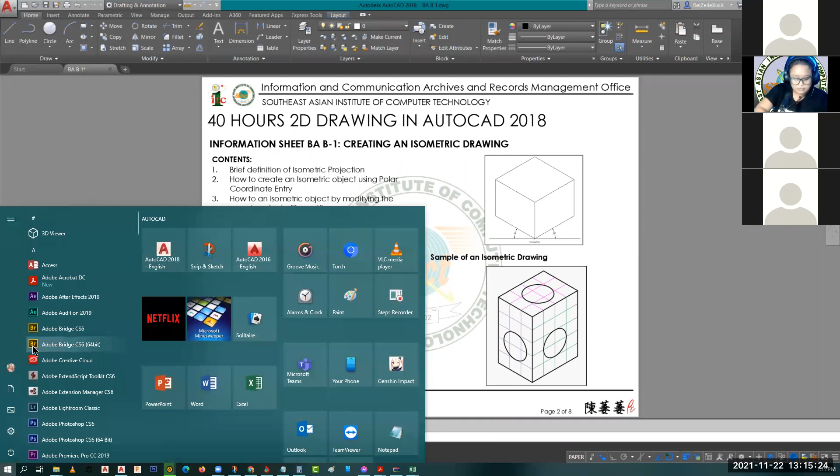So let's have a sample. Sandali, sige, I'll use paint. Hindi ko pa kasi siya binuksan kanina. Okay, i-align ko lang ang aking mic at saka ang aking tablet.

Okay, so for perspective drawing, you need... let's have this as your horizon. I know it's not a perfect line since I'm just using a pen. If you want to create a perspective drawing,

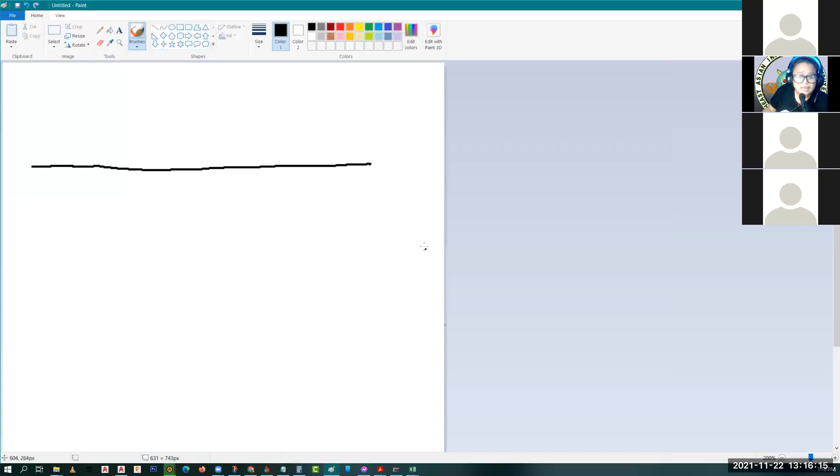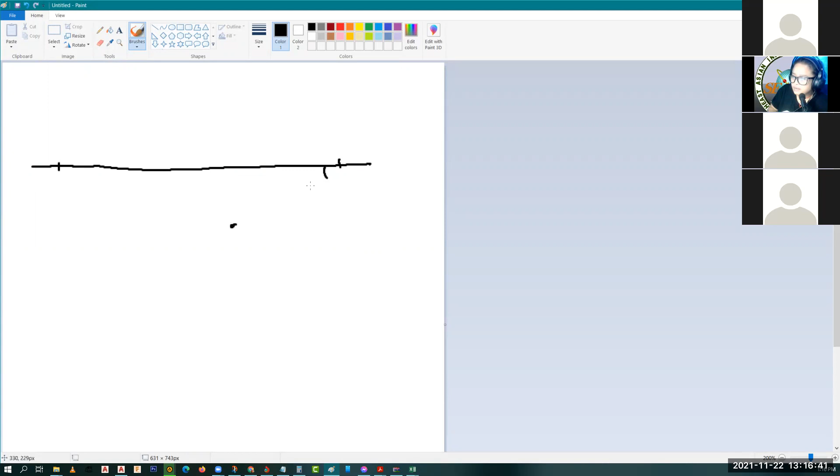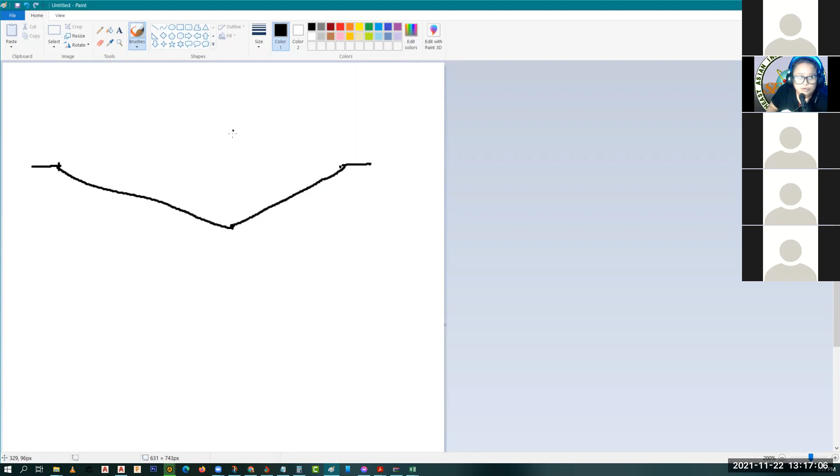Okay, so this one, let's erase this. Basically that's an angle, right? Now, if you have a height here, let's say the height of your box, you have something like this. This end, you need to reconnect to this edge. So that's your perspective line.

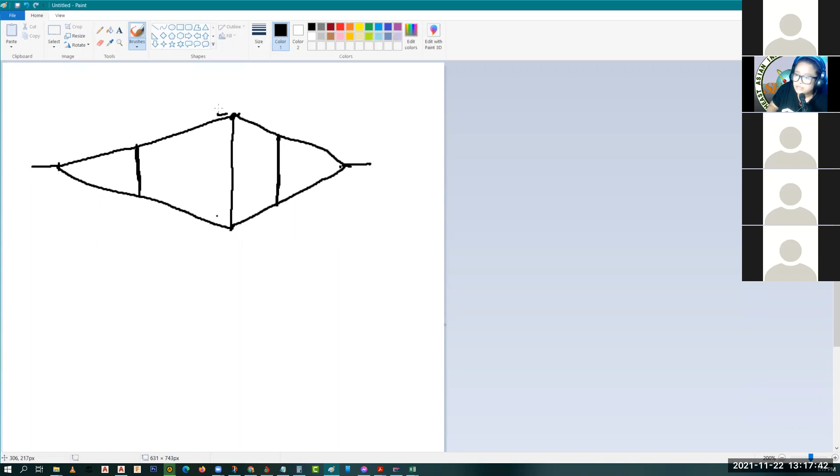Now, measure the length of the box. Let's say here, then here, let's say that's it. For this one, if you have 10 units here, because you used an angle, the height of this is less than 10, because there's a height difference due to the angle. So it's the same here, less than 10.

So that's your perspective. For 3-point, there's also one up top. So you connect your points. But for isometric, let's delete this.

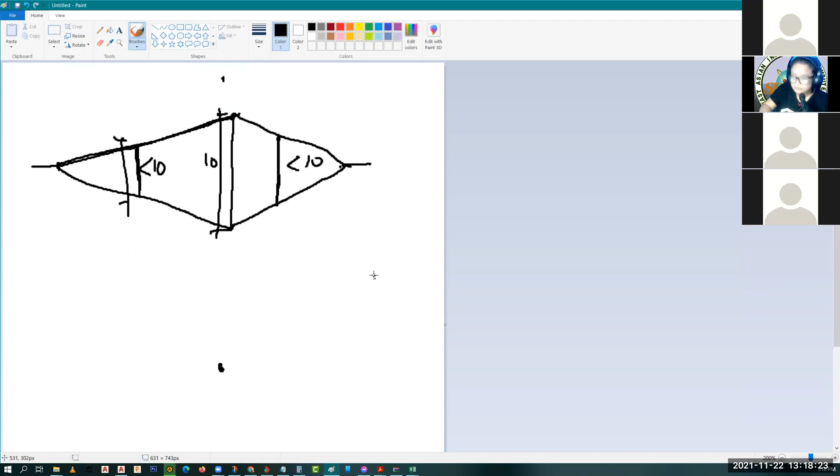I'll use this. So for isometric, you will use angles as well. Oh, it's not matching. But you use a uniform 30 degrees on each side.

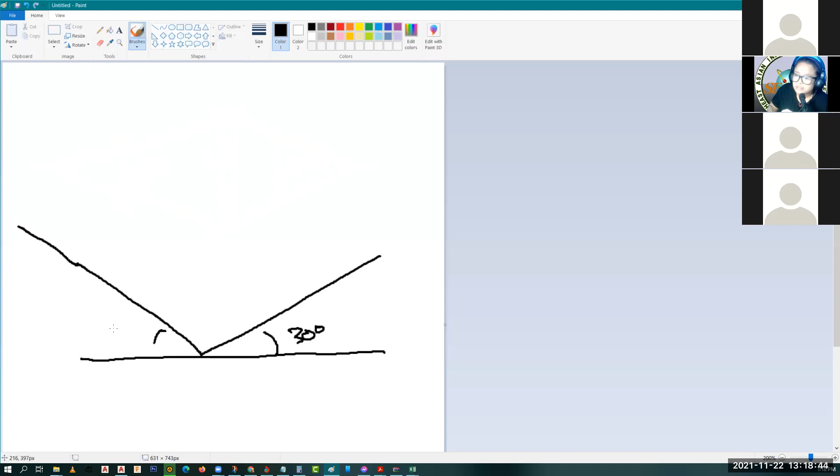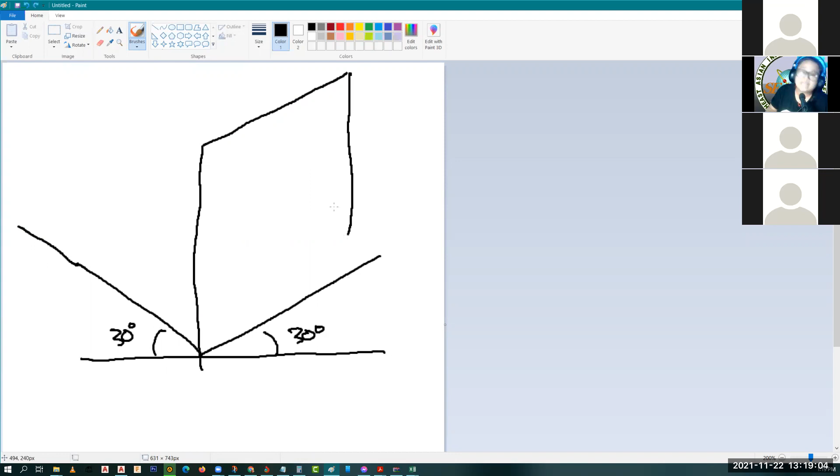Okay, so it's even. Now, if you have 10 units here, and let's say 10 units here too, say like this, 10. If you have a height of 10 in one corner, this is also 10 in the other corner. So that's our perspective, that's our isometric projection.

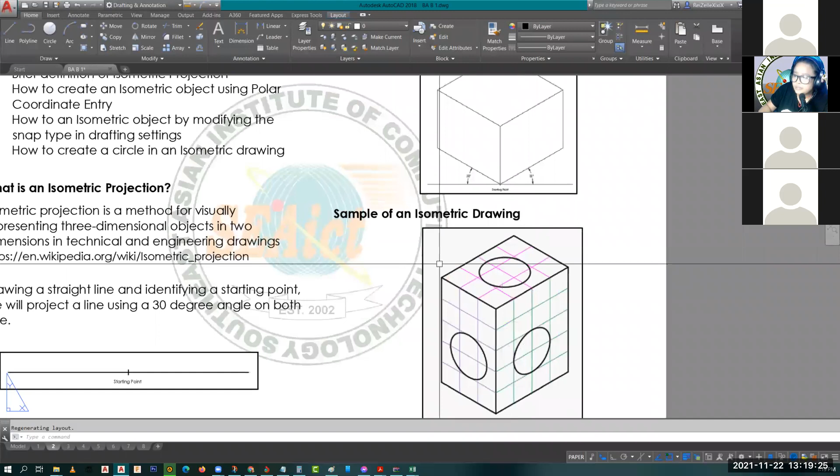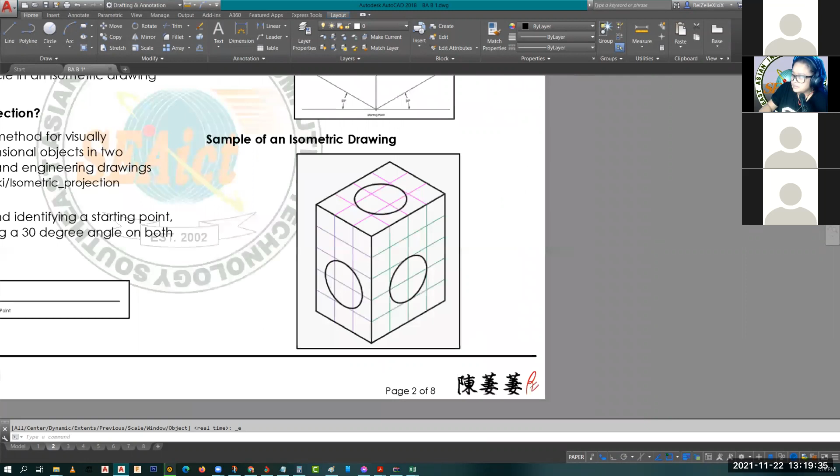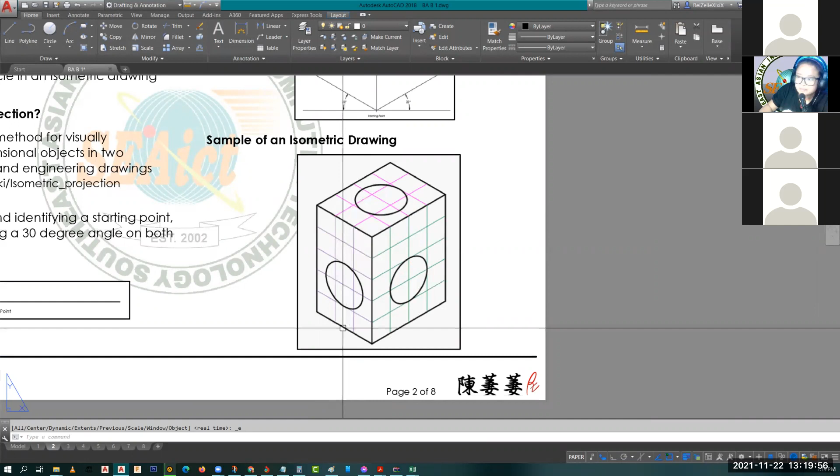So zooming in, this is our sample isometric drawing. My mouse is acting weird. Okay, so if you have 3 units here at the bottom, the length of our imaginary box, at the top too, you have 3 units as well. So whatever this measurement is, that's the same measurement here.

So going to page 3. So here we are now on how we create this isometric projection or isometric drawing. So as I said earlier, you have 2 ways of creating isometric drawings: either you use polar coordinate entry, or you modify your snap setting in drafting setting.

So this one, true story. True story, ano. When I was still a child—joke—in school, of course there was an AutoCAD class, and I was not that type of student.

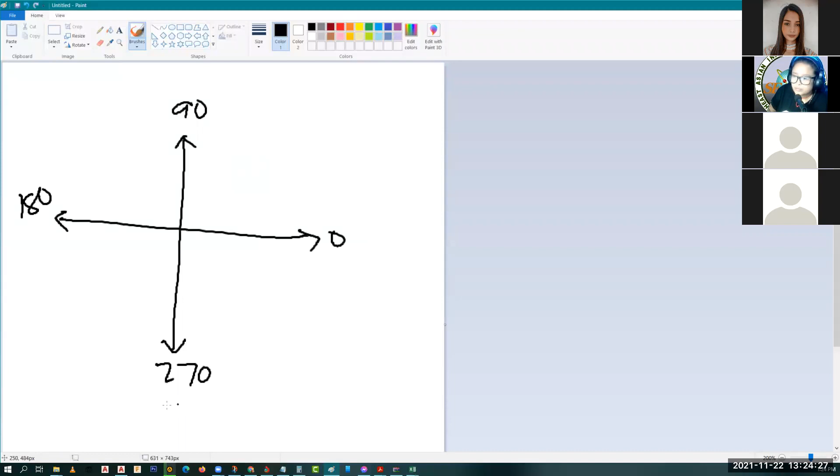So again, quick recap. So if you have—sorry, mali, let me redo that. So this is 0, this is 90, this is 180, this is 270. And you can use negative values. So this can be negative 90, this negative 270. So why would you use negative 270 if you already have 90?

Okay, so if from this point you'll make a line of 5 units with 45 degrees, 5 units: you will command at 5—this is your length or change in length—that's fine, then use 45, this is the less-than sign, 45 is your angle. So after that, enter.

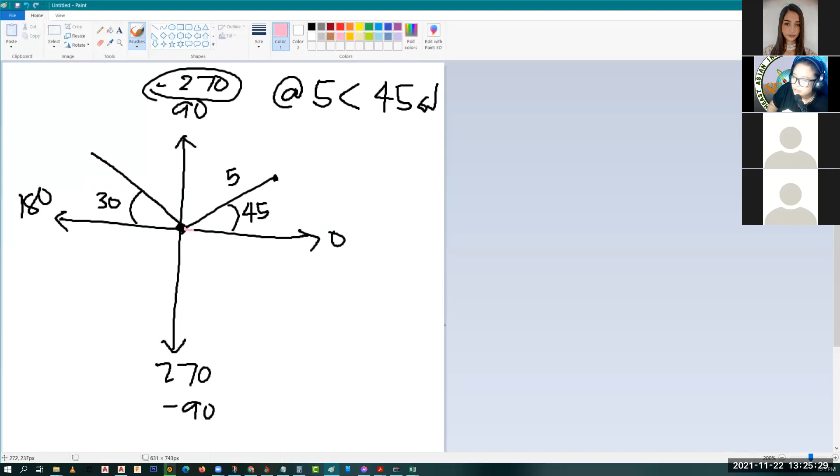So if you will create this line from this point, this is, let's say, 30. So the angle you need will come from this one, pink. So this is what you need. So if you have a straight line, that's 180 minus 30, so you will use at 5—let's say the distance is just 5—5, angle, how much now? 150.

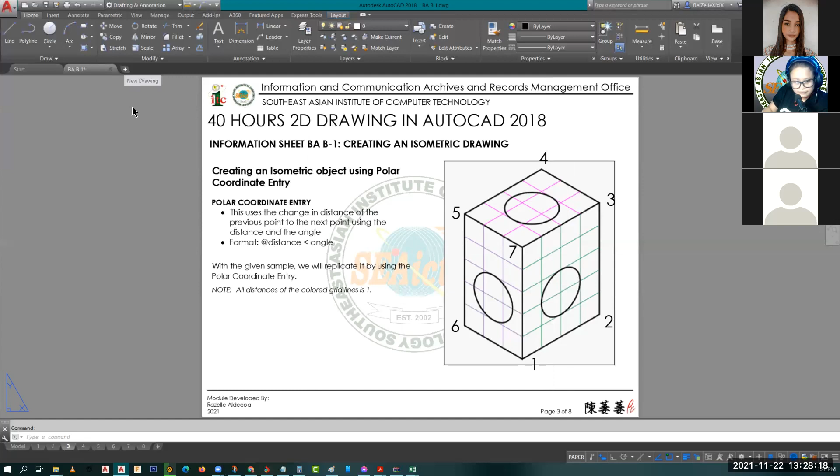I'll open a new drawing para makasample ako. As you can see, gray ang background. So para hindi nalulunod yung mga lines ko, I'll turn off the grid. Dun sa mga naging student ko before, sinabi ko I don't like grid lines.

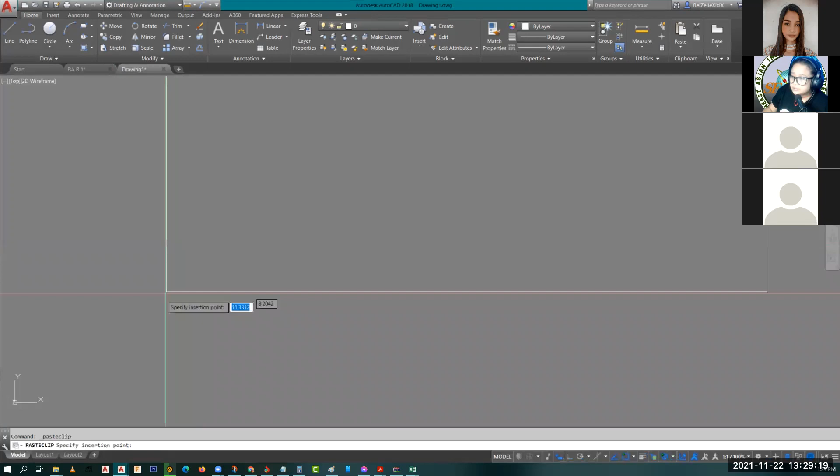Ay, mali ang napindot. Wait lang. Kukunin ko na lang yung image sa PDF, para hindi na ako maglipat-lipat. I'll paste na lang. Hindi rin nakasama yung number. Flat.

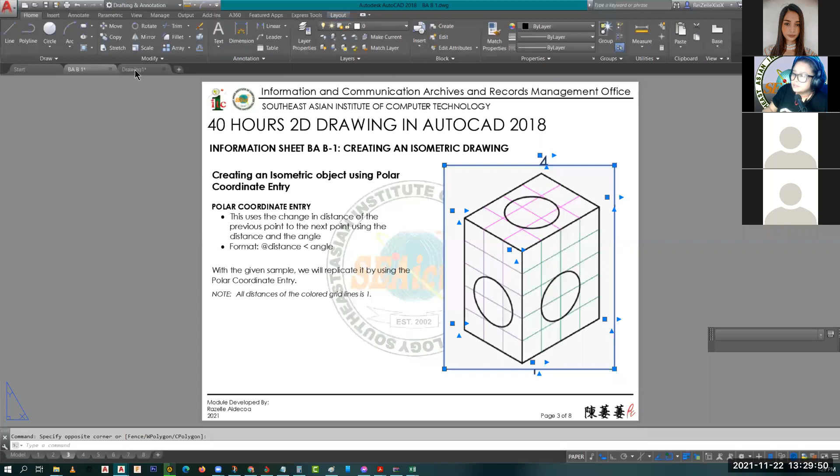Okay, so if the number doesn't come out, wala din siya, so ito na lang ang kukunin ko para kasama yung numbers. I'll just use copy.

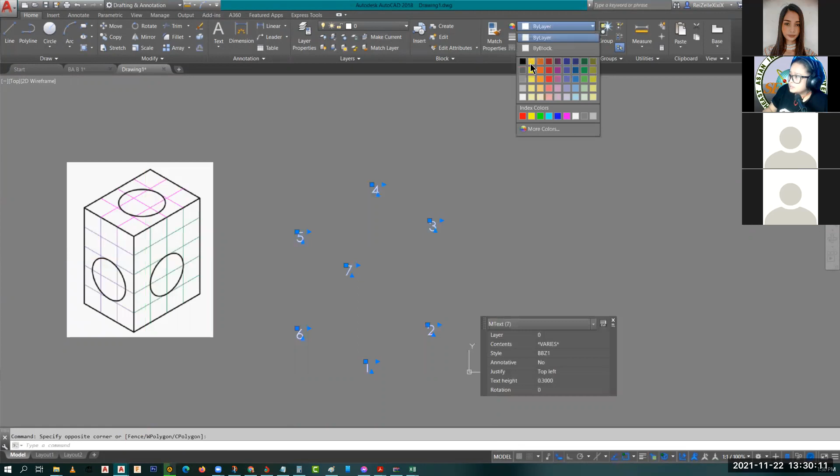Ayusin ko lang to, this one. Wait lang ha. Yan na, sige, konti pa. Yan, pwede na siguro. So we're going to replicate this object using the polar coordinate entry. Balikan kita mamaya, Daryl, about dun sa product key pagkataas ng klase. Okay?

So, sabi nga natin kanina, the format of the polar coordinate entry is the distance, the angle sign, then yung value ng angle.

Okay, so yan. So here, if we want to create o to replicate this, kailangan natin magkaroon ng isang point. O, sabihin natin starting point natin is yung 1. Pupunta ka ng 1, 2, 3, 4, 5, 6. Tapos ihuli mo, after 6, babalik mo sa 1. Then you can connect 5 to 7, 7 to 3, then again, 7 to 1.

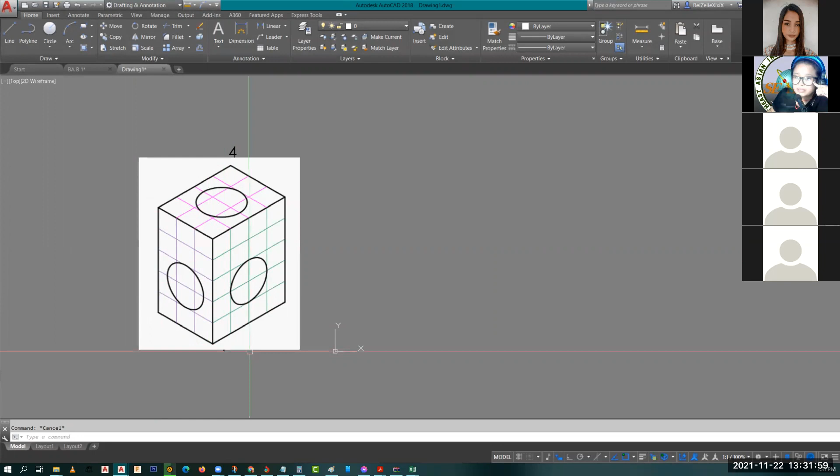Now, to create this, ang angle natin for isometric is 30, ang kahalusan dyan, 30 degrees. So from this point, papunta sa point 1, papunta sa point 2, the angle is 30. Diba? Balikan natin to.

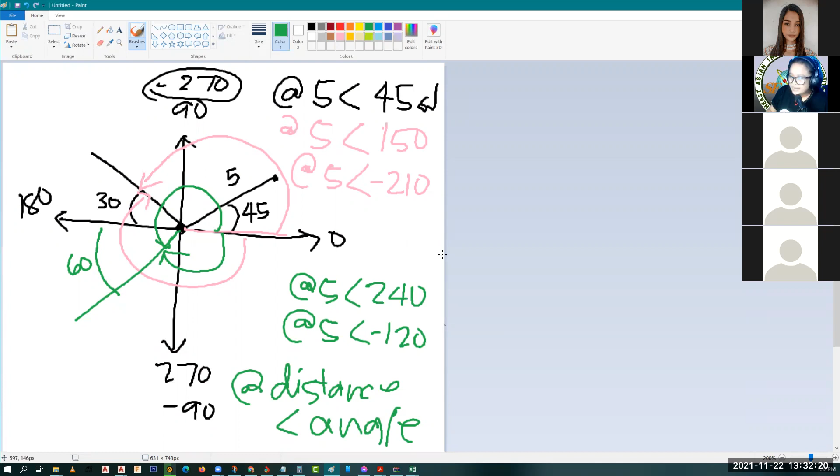Op, mali, hindi ka save. Control A. Yan. Ayan, so ito yung 1.

Palitan natin color, blue. 1, 2, 3, 4, 5, 6, and 7. So from this point, ipoproject mo lang yung x-axis, yung positive x-axis. Coming from this point, iproject mo pa ganun, pa right. Ang mafo-form nito is 30 degree.

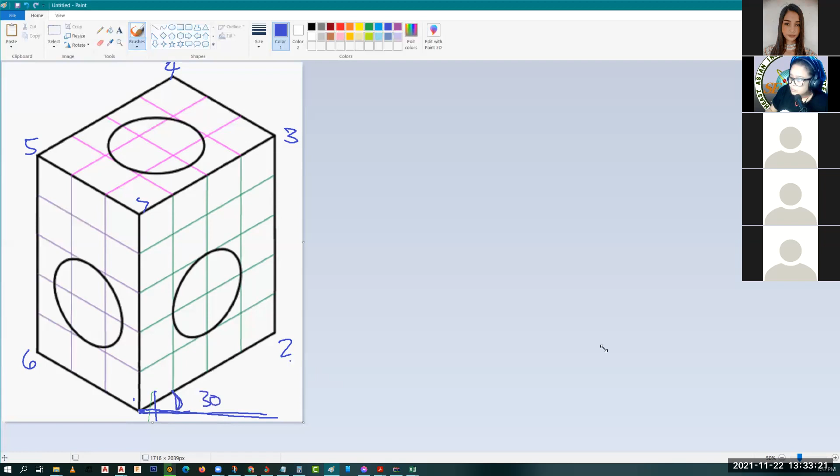So hindi mo na natin gagawin dun sa ating AutoCAD. Very basic command, line command, enter. We do not have a specific point here, so just click anywhere sa ating drawing area.

So here we have, we count, kasi hindi naman given yung number niya talaga. So all we have is the grid lines, and all grids have 1 unit ang distance. So to create point 1 to point 2, we count the box. So 1, 2, ay. So 1, 2, 3, 4. So that's our length, or that's our distance.

So at, for angle, ito, this one is 30. 30, enter. So nandito na tayo sa point 2. Now, ilan na yung distance niya? So 1, 2, 3, 4, 5. So at distance 5, angle. The angle here, straight up, straight na nga, no? Or vertical. So we will use 90 degrees. So dito tayo. 0, 90, 180, 270. Okay? Next.

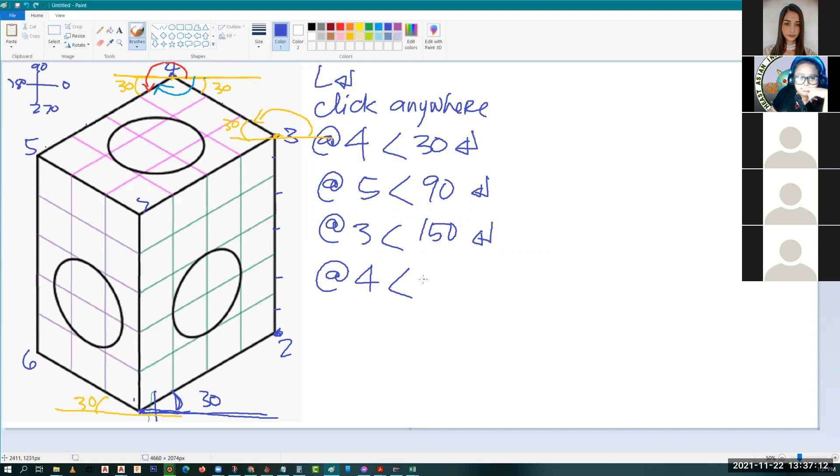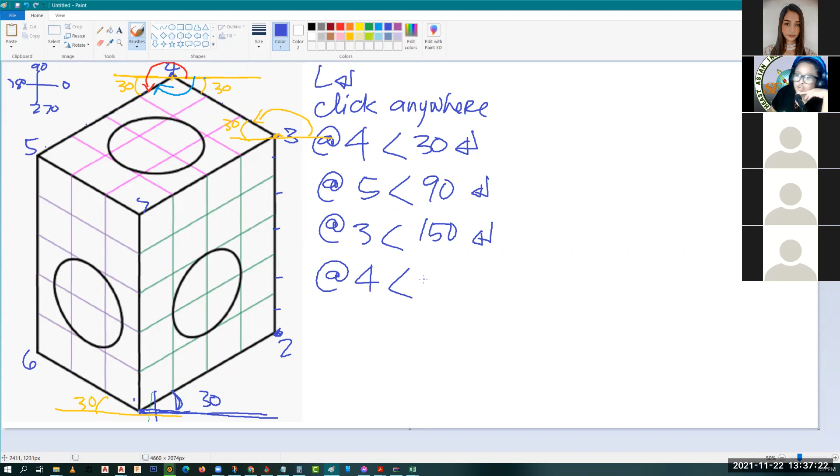So kakount na naman tayo. So 1, 2, 3, 4. So at 4, the angle, anong pwedeng gamitin na angle, guys? Wala. Okay, the angle you can use is for negative, you can use negative 150 or you can use 210. So the straight line is 180 plus 30. So 180 plus 30, 210. So this one, this is 180. Tapos, less 30, 150. You use the negative value kasi clockwise direction siya.

Double enter, ma'am, or C. Pag nag-double enter ka, you need to provide yung sunod na point. So pwedeng at 3, kasi 1, 2, 3, pabalik ka. Angle negative 30, or gusto mo naman positive 360 minus 30, 330. Or yung pinakamadali na command is C, enter. This one pala, double enter ito. Kasi the first enter, ito yung pagpunta ng point 6 sa point 1. Then the second enter finishes the command or cancels the command. So this one, C is for close, provided that it will close on the first point you provided pagka-command mo nung line command or any other command.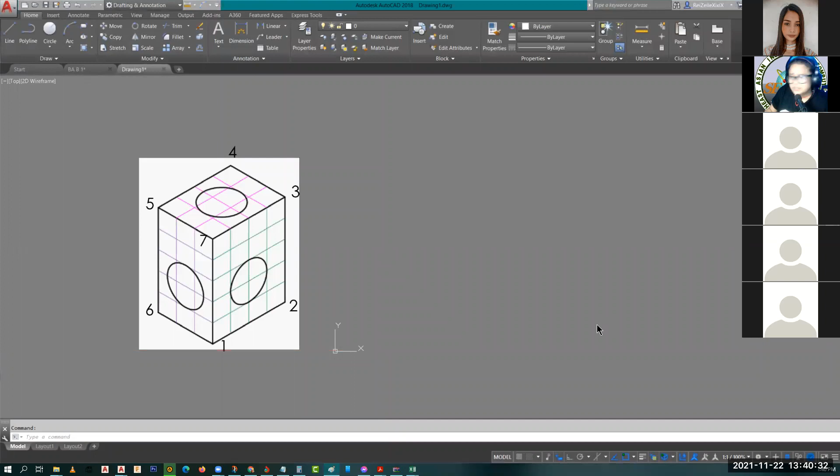So line, L, enter, or you can click the button for line under home command, draw group, or you can type the full word, line. Pero L na lang, di ba? Click anywhere, point 1 to point 2. So at 4, angle 30. Nakikita niyo sumusunod, pumupunta na lang dun yung ating line. So sunod, at 5 angle 90. Then at 3 angle 150. At 4 angle negative 150. At 5 angle negative 90. Close. Okay, so yung outer part ng ating isometric box nagawa na.

So let's create this part. Hindi ko nagagawin dun sa paint, dito na lang agad. So from this point, kailangan natin dun at 3 angle negative 30. Then for this one, pwedeng hindi na kayo mag-command. If your object snap is turned on, i-detect nyo na lang yung endpoint, mas madali. Ang medyo masakit lang dyan is yung edges, kaya dun tayo gumagamit ng polar coordinate entry. Once na may edges na tayo, mas madali na lang mag-connect ng line. So this is creating this isometric box using polar coordinate entry.

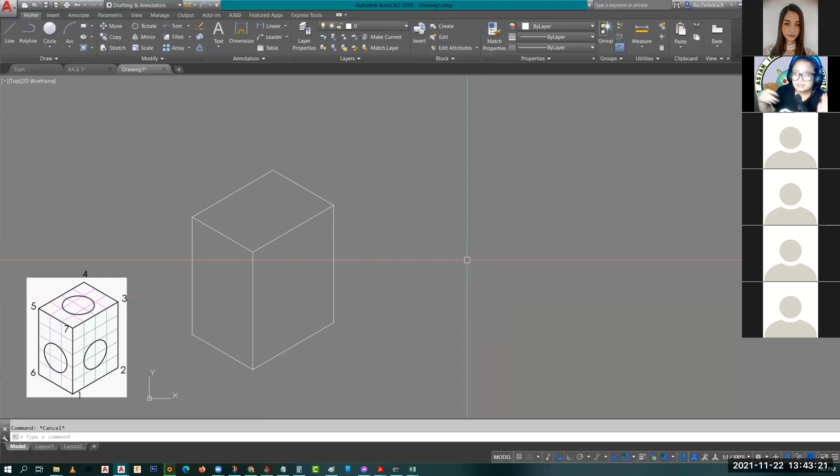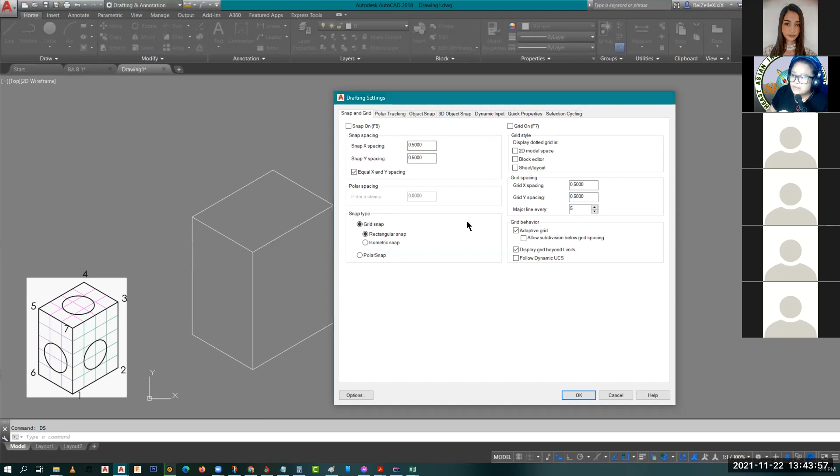Ang default niya, your crosshairs are cross, horizontal and vertical. So when you use a different snap type, DS, ito, under drafting settings, nag-DS ako. Lalabas yung dialog box ng drafting settings. The first tab is snap and grid. Here you can use the isometric snap under the snap type. So balikan natin ang itsura, ha. This is our grid sa rectangular snap. Tapos when we change it to isometric snap...

The crosshair, you can toggle 3 different crosshairs here. So this one is intended for this part of your isometric projection. You can toggle by clicking or pressing F5. F5, madali lang sa keyboard. So for this cursor or this crosshair, intended para dito. Tapos another F5, so this one. So if you don't remember F5 as your toggle, you can use the ISODRAFT here sa ating status bar. So ito ang ating status bar.

Dali. Wait. Parang nawawala ako, hindi ko nakikita yung aking self. Wait. Ayun, nasa ibang lupalop ang aking mukha. So at least gusto ko lang makita kung anong itsura ko. Anyway...

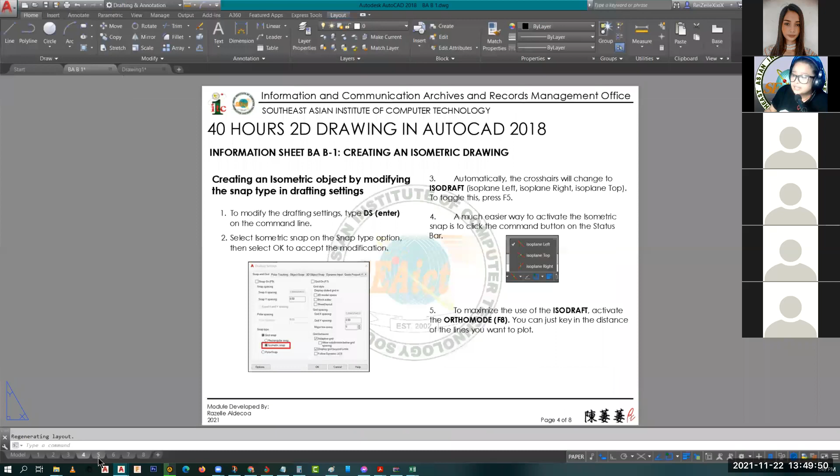So next on the list - I discussed it already, nag-jump na ako - is creating a circle for isometric drawing. So dito, kung mapapansin ninyo... yes, question?

Mute ka. Okay, so here we're creating a circle, pero hindi circle command. Ang command dito is ellipse. So dito na tayo, here para... aray ko, dali, okay, sorry, natawid ko.

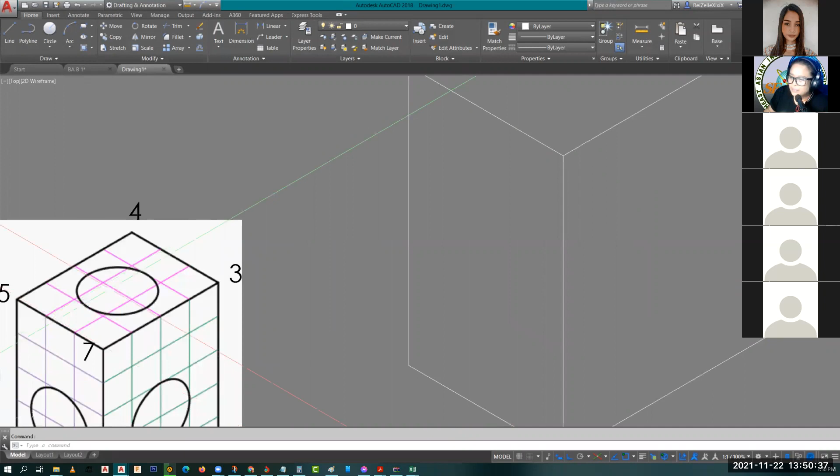Pinakamadaling gawa ng sample is the top circle kasi nasa gitna lang siya. All we need to do is create a reference line, midpoint or endpoint to endpoint here.

What you need to activate is not circle, kasi pag nag-circle ka, circle talaga ang magagawa niya. So let's say... umid ko na lang, yan - hindi siya lapat. Kaya ang kailangan natin is isocircle.

Para makagawa ka ng isocircle, the command is under the command ellipse. So shortcut or command is EL, ellipse - ELLIPSE, baka may mali sa spelling, pero shortcut ay EL.

So here, before clicking anything or before designating or typing the center or the axis, what you need to do is click isocircle, so gagawin niya ay isometric circle. Either you click this or you press I, enter. I is for isocircle.

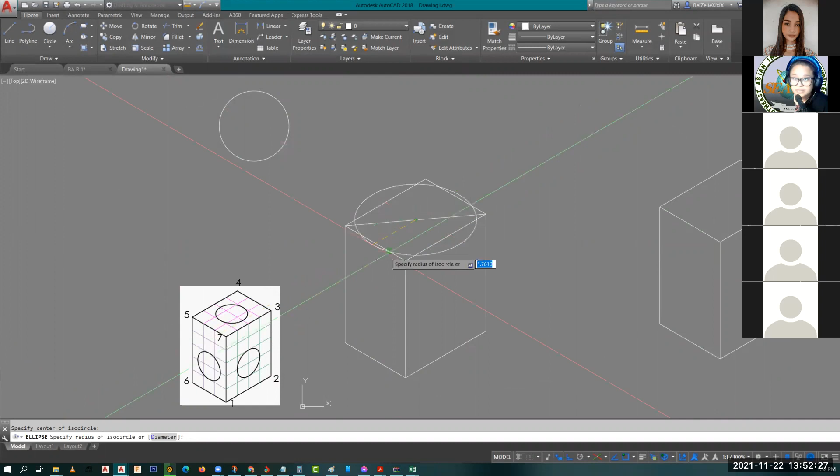Then it will ask you to specify the center of your isocircle. So dito, kukunin ko lang yung midpoint. Then the radius of this one - either the radius or diameter, whichever is given, so you can use that. As we can see here, the radius is 1, so I'll type 1, enter. So yan na.

So here, ang nagawa kong isocircle is along this cursor, dito sa plate na to. Now, what if dito ko gustong gawin and hindi ko siya pinalitan, hindi ako nag-toggle ng cursor?

Dali, so here I'll get this one. 1, 2 - the center is 1, 2. The center is 2 pataas, mid, so I'll use @2 angle 90. Yan, so yan yung reference ko ng center ng ating isocircle. So EL, I, center, tapos radius 1. Ayun, radius 1 - hindi siya lumapat because mali yung orientation ng ating crosshair.

So kung ganito ang crosshair ninyo, ang intended output niya is yung lapat sa taas, sa top. So here, I'll delete, EL ulit ako, I, center. So while the ellipse command is activated, I can toggle the cursor using F5 - hindi pa dyan, F5. So 1, enter, yan, then I'll create a reference line here, mid.

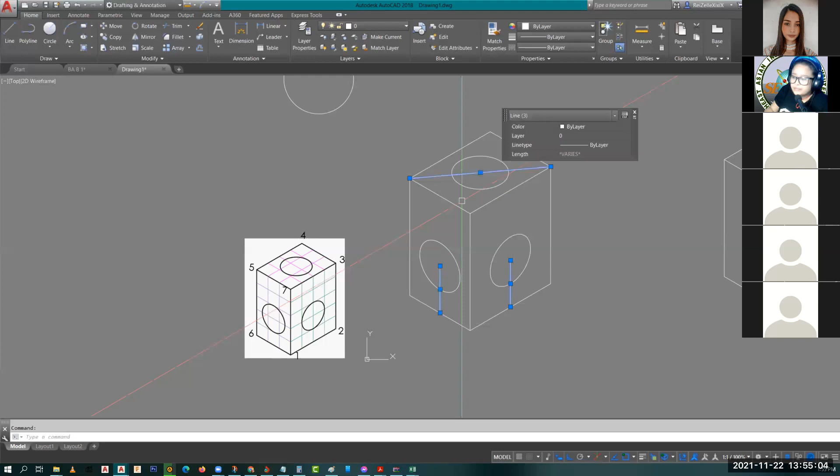Tapos 2 pataas, then again EL, I, center. Then ito, i-change mo na naman, so F5 - hindi pa rin, F5 ulit. So ano yung radius? Then after creating your isocircles, you can delete your reference lines, kasi hindi naman siya kailangan doon sa drawing talaga. We just created that reference para mas madali yung mailapat yung ating isocircle.

Di ba? Madali lang, guys. Walang nag-agree? Yes po. Yay, yes, so yan.

Sa mga bago, minsan nagsasalita lang ako tapos bigla ako magtatanong just to make sure na nakikinig pa kayo sa akin, kaya minsan matagal. Pero pag wala akong naririnig, I'll move on.

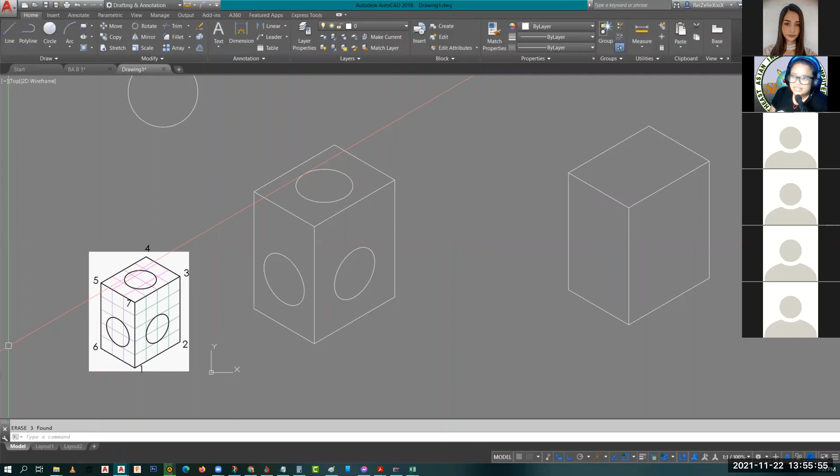Yes, for this part, pag-create ng isometric drawing, you need talaga to practice. That is why - so tapos na tayo diyan.

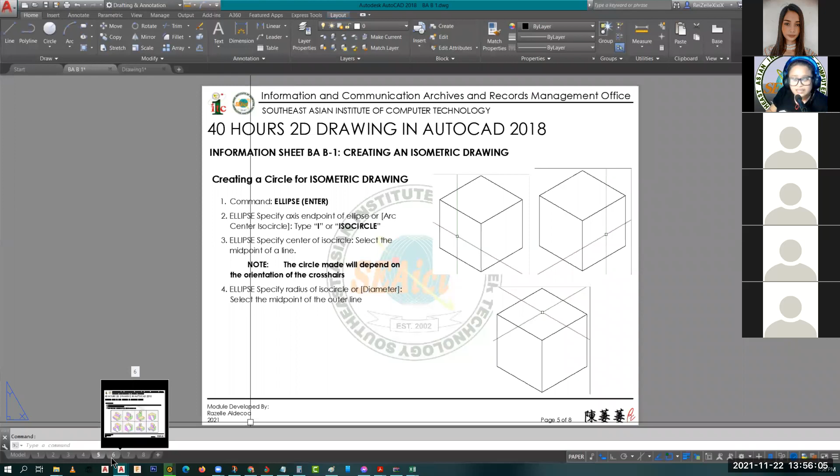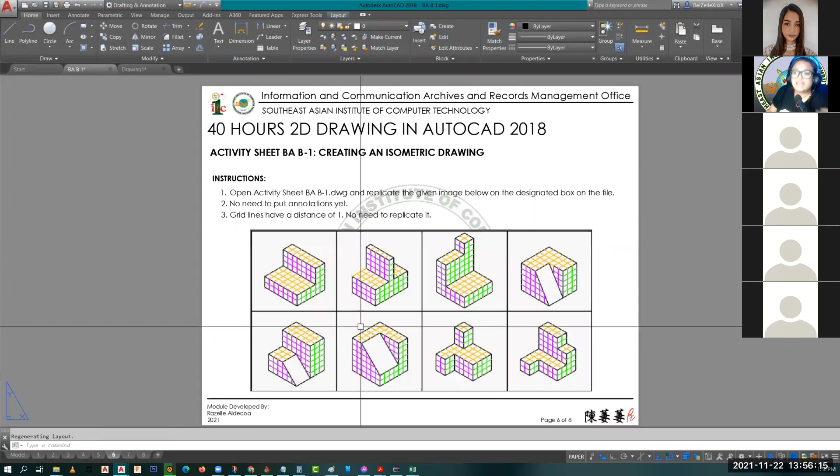You have 3 sheets - activity, job sheet, and project sheet. Nalimutan ko na yung sheets, so ito na, explain ko na. So this one, yung mga for today's plates, puro simpleng object lang siya. You need to be familiarized, not memorize, to be familiarized on the process para malaro nyo siya. Hindi pwede na i-memorize nyo kasi baka, or most of the time, hindi naman similar yung case. Kailangan you can adjust to the situation you are facing.

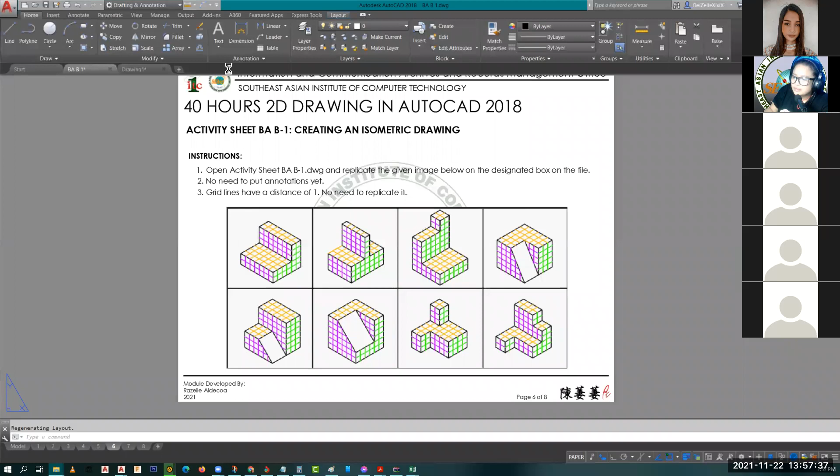Instruction for the activity - open activity sheet, BA B. This is given, so let me just open the file para alam nyong tama yung na-download nyo, or alam nyong malalaman yung may mali pala yung nabigay ko sa inyo. Again, most of the files, pinoprovide ko naman. Yung hindi ko ipoprovide, mag-create kayo ng new file. So the instruction is stated naman.

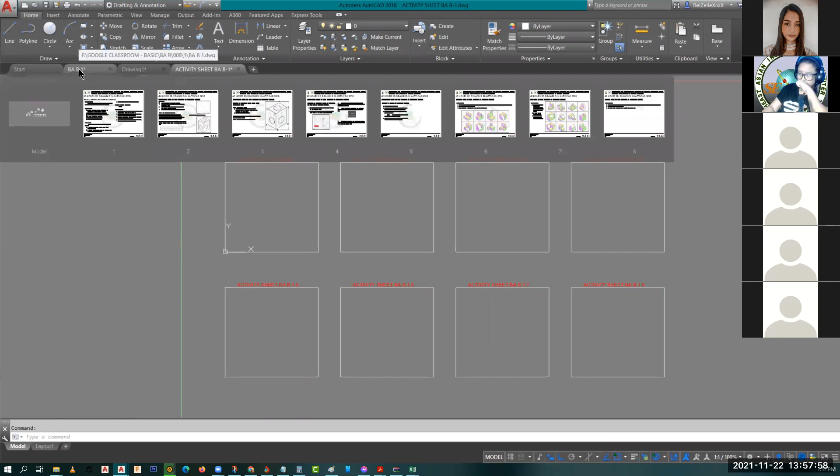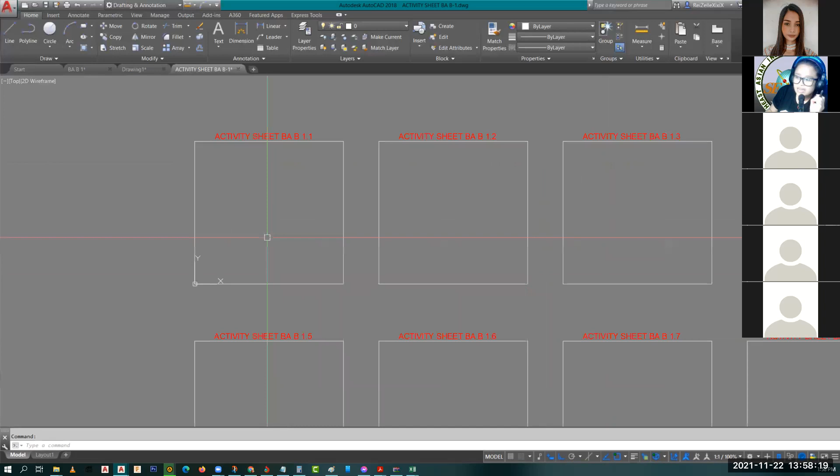For this activity sheet, I know this is a little plenty, pero it's for you to practice. Madadali lang naman siya, so you have 1, 2, 3, 4, 5, 6, 7, 8 - dito nyo lang gagawin. I did not provide any starting point. What you need to do is pagkakasyahin nyo na lang siya, itantya nyo kung saan kayo magsa-start. And most of the time, kasya naman siya, lapat siya diyan. Okay?

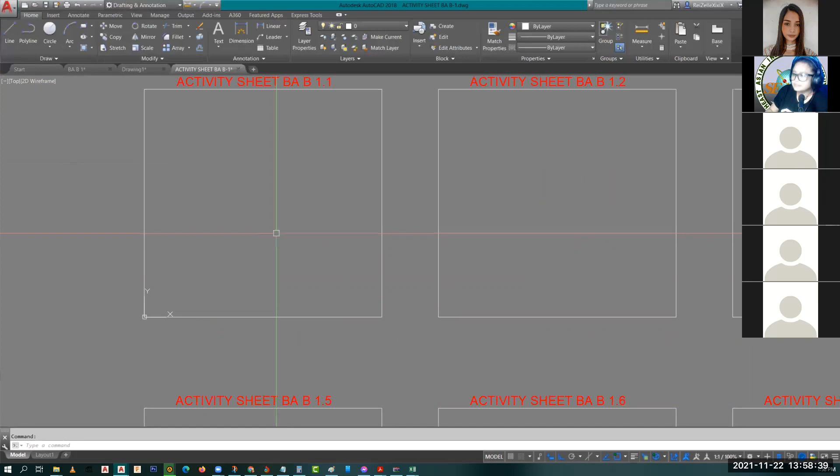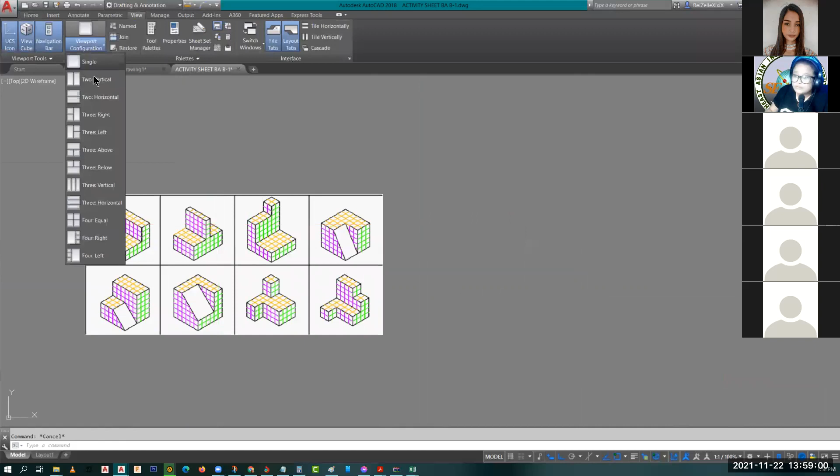Dali, sample, para at least alam nyo kung paano siya gagawin. Okay, so kinopy ko lang from the other sheet or the other file, tapos ipinaste ko lang dito. I'll now use two vertical viewport para at least hindi na rin ako mag-control, Alt-Tab.

So here, for activity sheet BA B 1.1, ito na yan. 1, 2, 3, 4, 5, 6, 7, 8. So I'll do this, sample muna. First, I need to activate the ISODRAFT.

So pwede ito, or DS, enter, tapos snap type, ISO, tama, isometric snap. So mas madali din yung sa ito. Okay.

Clarification, this is not solid object pa, this is still 2D drawing. Kaya nga 2D isometric, so you're just creating a 2D representation of your 3D model. Puro line lang siya, yung magpe-press pull, yung 3D commands, that's for module 3. Okay, so the leveling of the modules: first module, 2D drawing, as in yung XY lang. Module 2, XY lang pero isometric. Then module 3, that's for solid modeling or solid drawing.

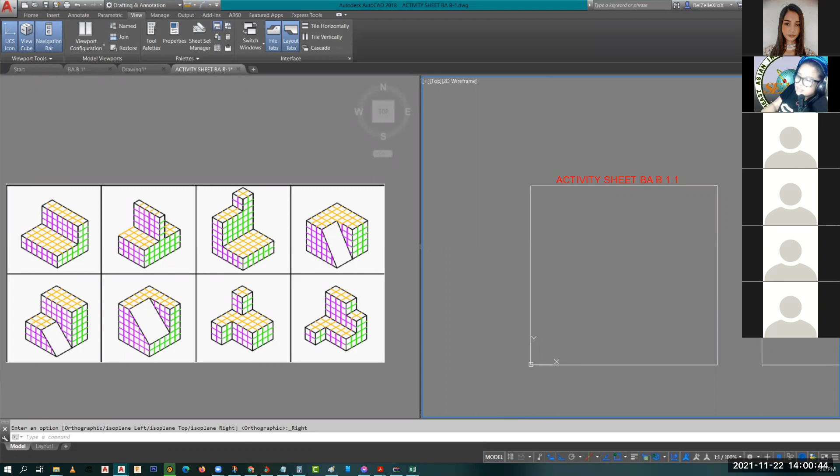Okay, so this one will create this part. Bibilang lang ako, hindi na provided yung measurement, bibilangin ko na lang. So pwede ako mag-start dito sa part na to. 1, 2, 3, 4, 5, 6. 6 by 1, 2, 3, 4, 5. So 6 by 5, tama na ako.

Naka-on ang ortho, that's fine. So dito na ako. 6, 5, 2, then 3. So syempre 6 minus 2, that's 4. Then pwede ka naman mag-close or ibaba mo, then F5, toggle ka naman ngayon. 2, 4, 6, 7, 7. So yan na, kinancel ko na.

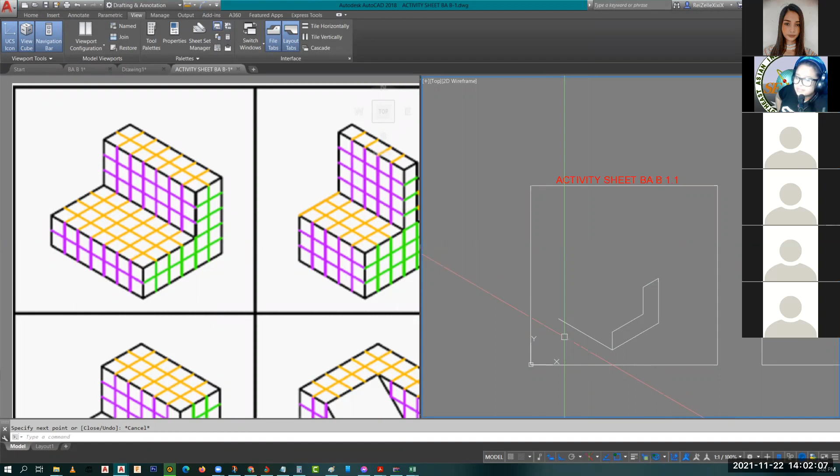So pwedeng hindi mo siya i-command lahat. Kaya ang preference o ang nakalagay doon sa requirements, doon sa knowledge, kailangan marunong ka ng draw command at saka modify command, because what you can do here is you can select this, copy, use the copy command, endpoint to endpoint. Then this one you can copy as well.

So hindi ka na nag-command, ang ginawa ko na lang is yung frame, tapos copy. Yan, so that's your activity sheet BAB 1.1. Again, you don't need to replicate the grid lines.

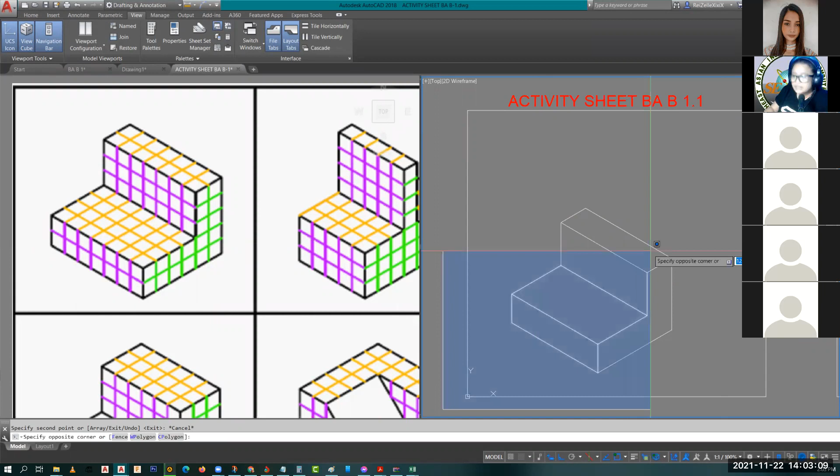Nakakaduling po yan, the grid lines are there for your measurement, so ka-count mo na lang. 1, 2, 3, 4, 5, 6, 7. 1, 2, 3, 4, 5, 6. 1, 2, 3, 4, 5. Okay? So yan po, that's your sample for activity sheet.

Next one, 7. So here, nakalagay din dito, open job sheet BAB-1. So it is still provided, job sheet. Okay, so dito na naman.

I'll open, so you have 12 individual boxes. 1, 2, 3, 4, 5, 6, 7, 8, 9, 10, 11, 12. So dyan nyo po i-draw itong 12 na to. 1, 2, 3, 4, 5, 6, 7, 8, 9, 10, 11, 12.

Sige, anong isa-sample ko? Kayo isa lang ha, kayong pumili. 11. Ay, wow, talaga. Okay, sige, para makita nyo na.

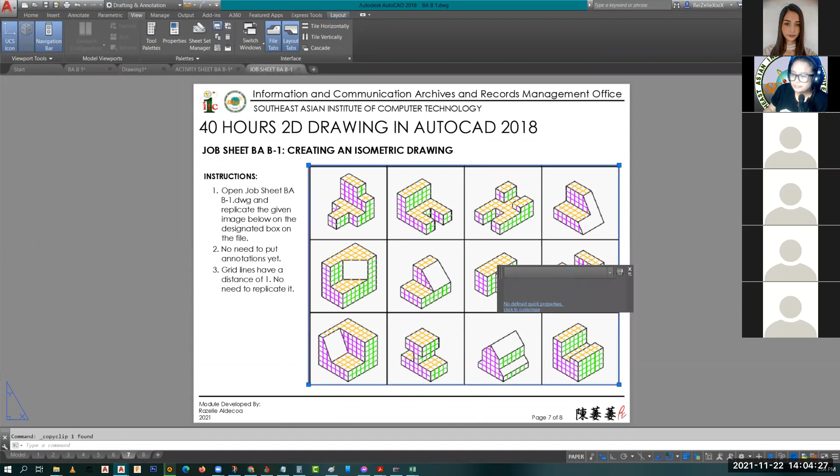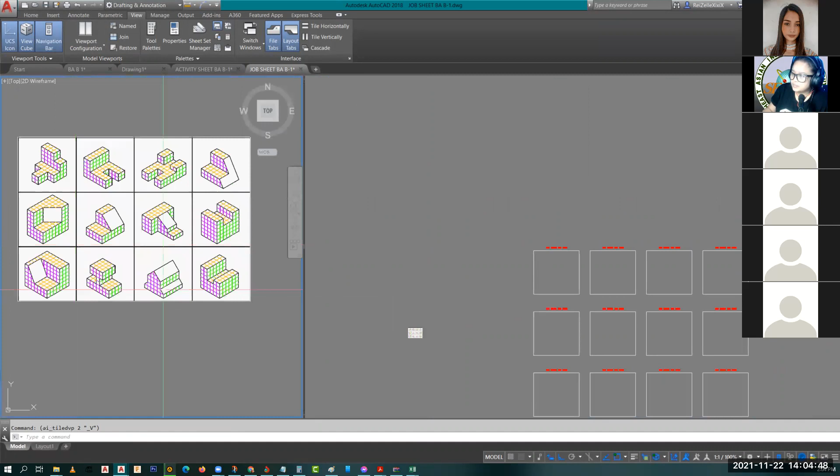So for 11, I'll copy this again, and I'll paste it here. So okay lang. Tapos, 2 vertical. So 11, this one. Okay, so yung wait.

AutoCAD 2022, naka-download AutoCAD 2022 trial version. Okay lang naman, meron din ako. Kasi wala pa ako nakukuhang matinong installer, pero I'm trying to be familiar with the latest version. Okay lang, so mabubuksan ko pa rin naman yan.

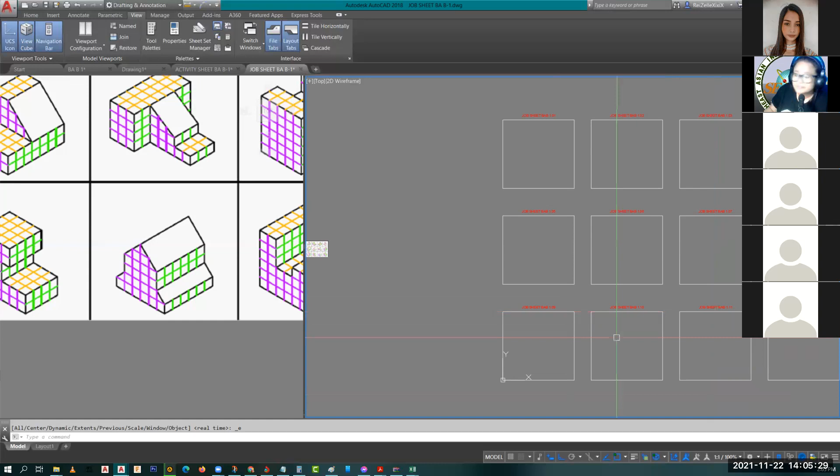So sige, 11, ito. Siyempre kailangan alam muna natin. Okay, so we have 1, 2, 3, 4, 5, 6. 1, 2, 3, 4, 5, 6.

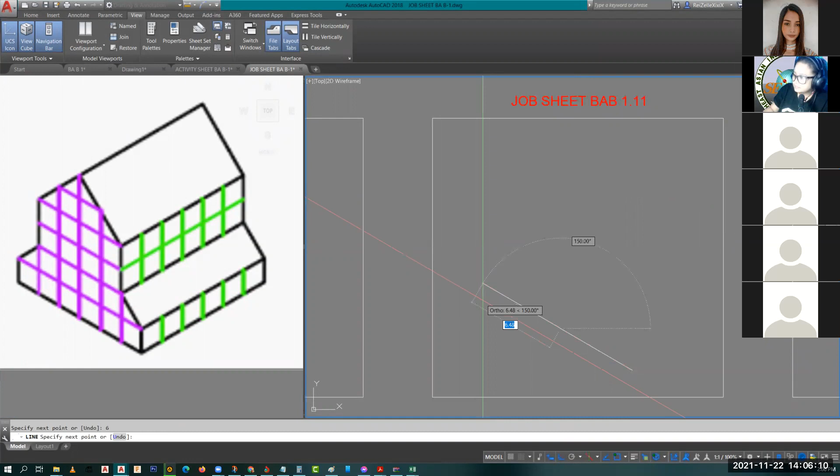So ang kailangan ko, activate the ISO, so okay naman ang ortho. So this one is, ilan to? 6. Tapos 6, okay, so 1. Ito, depende sa strategy nyo, 1, 1, 1.

So dito, pwede ko na connect. I'll delete this, so nagputol ako ng line command. Walang problema. So this one, this is 2, tapos connect mo doon. This one, 4, para direkta ka doon, END. You can call out the objects para mas madali.

So this one, copy, para hindi na ako mamroblema. One, 10. Op, bakit ako? Hindi, dapat hindi na ako dito gumawa. So this one, ito na yung chat. Okay, I'll delete this.

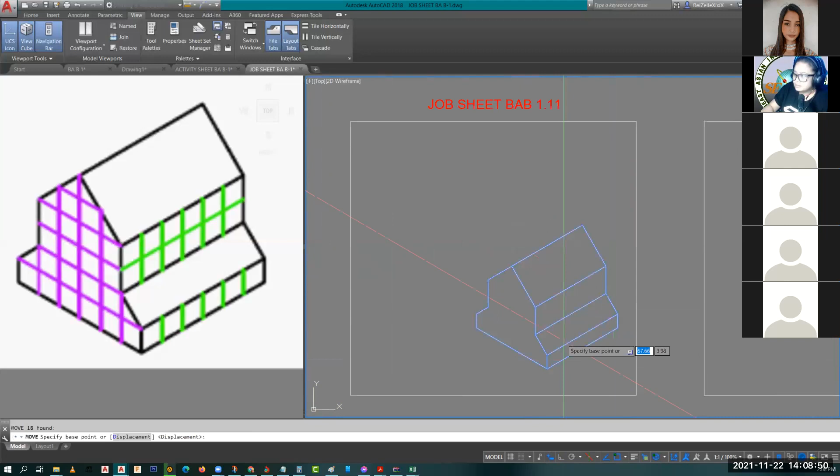Okay, so yan na po. Hindi ko masyadong na-adjust, so pwede nyo naman tong i-move sa gitna. Yan, getch ba? Getch?

Nakuha nyo ba, guys? Yes po. Okay, yes po. Wait lang ha.

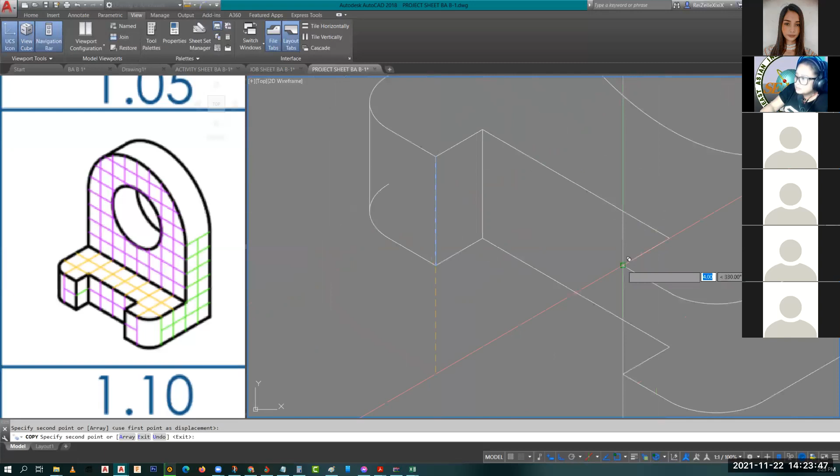We're not done yet because this is still incomplete. So for this one, intersection, then how many is this? 2, 8. Then straight. So trim the excess lines. Trim unnecessary lines. That's it.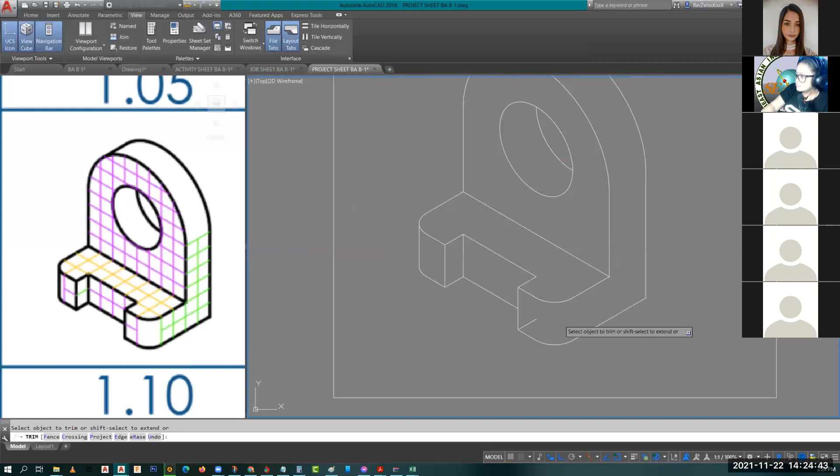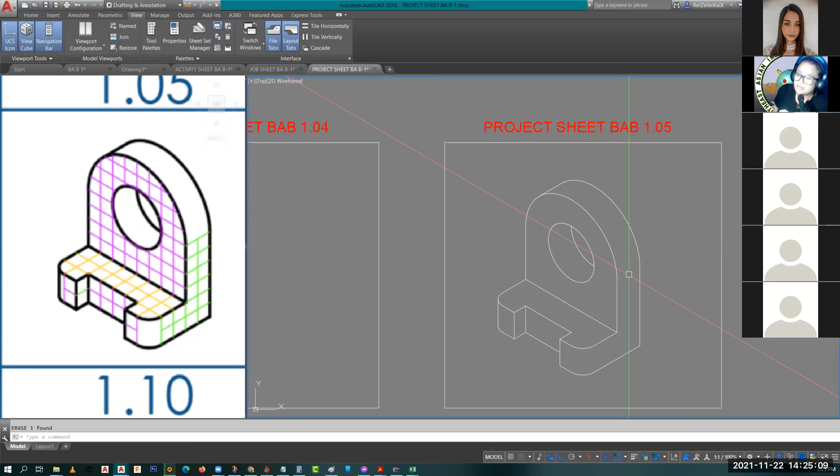Actually, if I don't instruct a certain way, it's easier. But that's fine - here, you can mix and match according to your understanding of the object, whatever you want to do. But let me remind you, you will not use fillet. You will use isocircle, ellipse isocircle. So that's it. Is that okay? Isn't it easy?

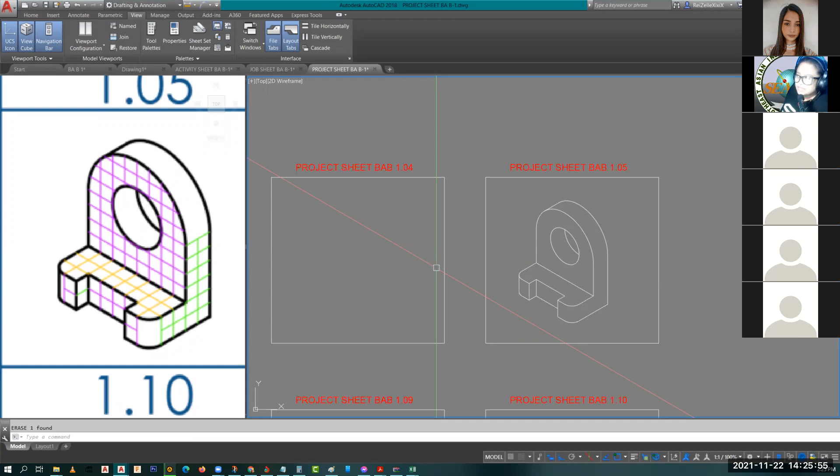I don't think you can use mirror because for mirror, you need what's called a mirror line. When creating ISO objects, your mirror line won't work unless you will create that exact replicate on the other side. So for this, for example, this one - I need, what do I need here? This is the quadrant, but if I center it, send it going here, right? What mirror line would you use here? Okay?